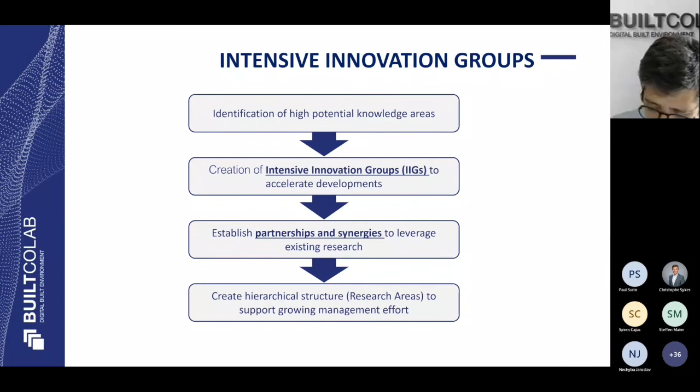The research areas we created are: smart transport infrastructures, IoT and smart technologies, BIM intelligence and digital twin, green transition, standards and digital transition. These were created based on our interaction with the industry, also based on the high potential knowledge areas we identified.

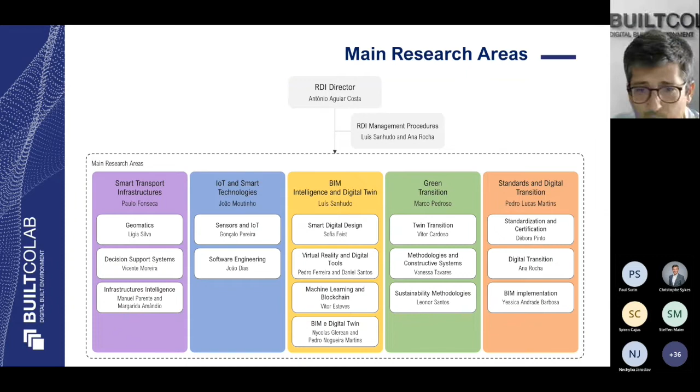And I might say that this BIM intelligence and digital twin area is one of the strongest right now. Also is what we think is the more mature in terms of development. So the distribution of the intensive innovation groups is this one.

The BIM intelligence and digital twin group has now many ongoing projects with the industry, and also some of them are projects that are funded and so on. But in fact, we have a very transversal approach, focused on the twin transition, and very much supported also by the government.

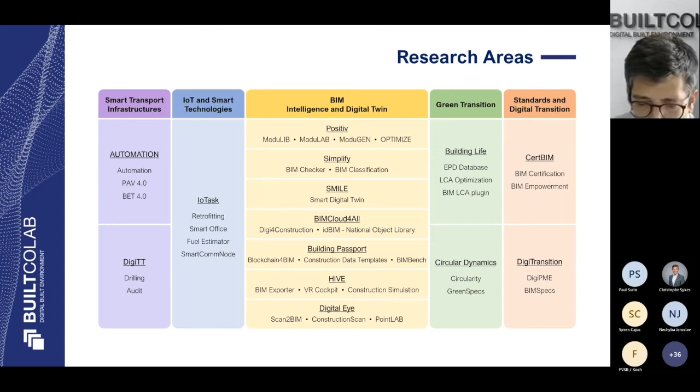For instance, within the green transition, we are right now doing the plan for the national plan for circularity in construction, and this is very important for us.

I would like to share some developments, and one of them is this. We must remember that we are less than 2 years old. One of our first developments was to try to bring modularization to BIM.

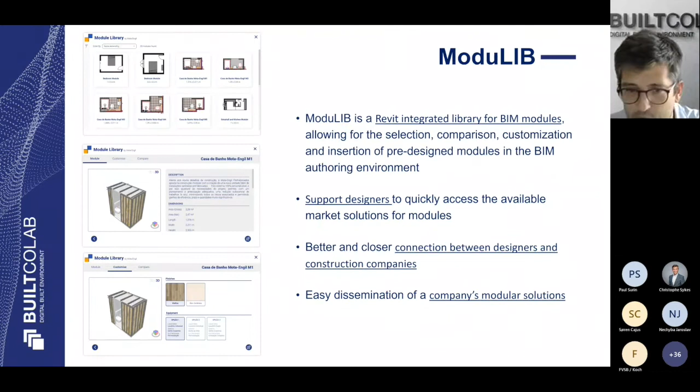Instead of having a BIM object library, we would like to have a BIM module library, which of course would try to incentivize this more modularized approach to construction.

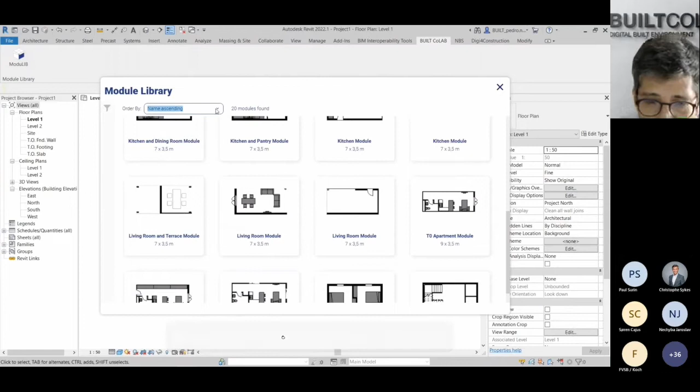So we have a small tool that allows us to have these modules, and we want to bring the supply chain to this platform that allows for this more modularized approach.

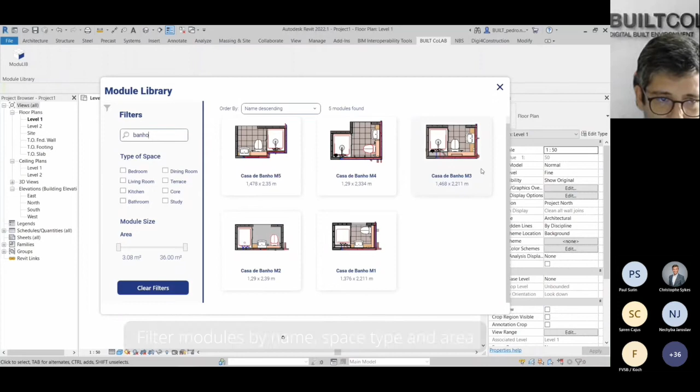Of course, when we showed this to the industry, they told us, well, this is interesting, but right now, and we were talking particularly with construction companies, they told us, well, right now we receive traditional design projects.

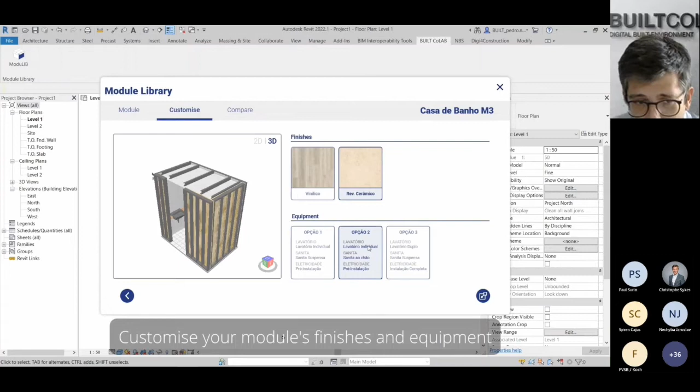They are not modular designs. So what we want is to identify the potential of modularization of this design project. So we stopped in terms of development this line of action. We have the plugin finished, but we start developing another

tool. This tool uses artificial intelligence to analyze the BIM model and identify similar spaces. We can apply it to every type of space. We demonstrate this with toilets.

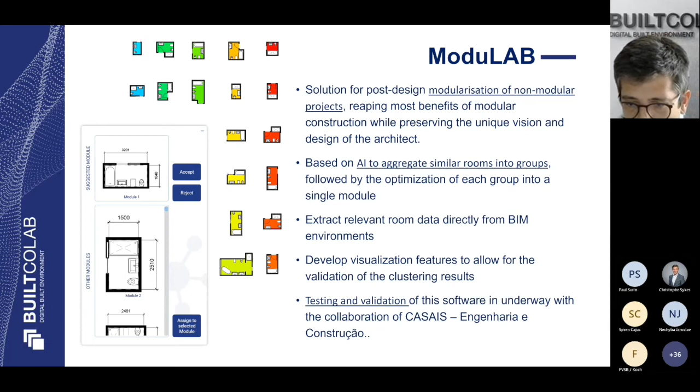And in fact, there is a clustering algorithm that looks at the different toilets or any other space and identifies similarities, groups the more similar, and actually it has a semi-supervised approach that allows the user to interact with the decisions.

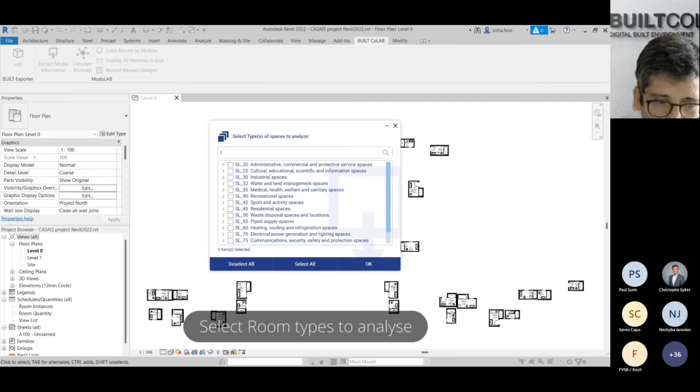And this was very interesting in terms of the receptivity from the industry, because they start looking at the designs, particularly, of course, the construction companies, and using this tool to decide the way to go. They understand better and more easily and quicker the potential of modularization of a specific design, and they can plan the construction works based on this.

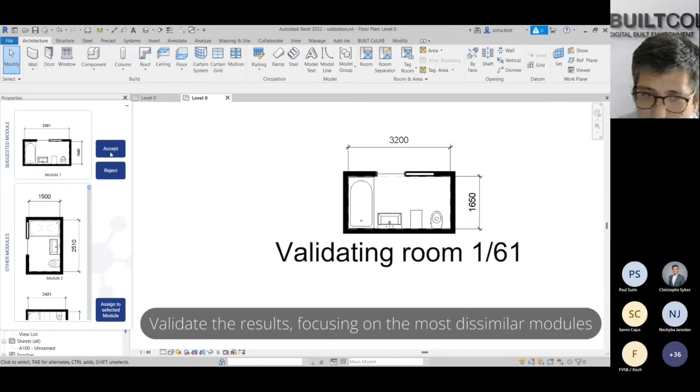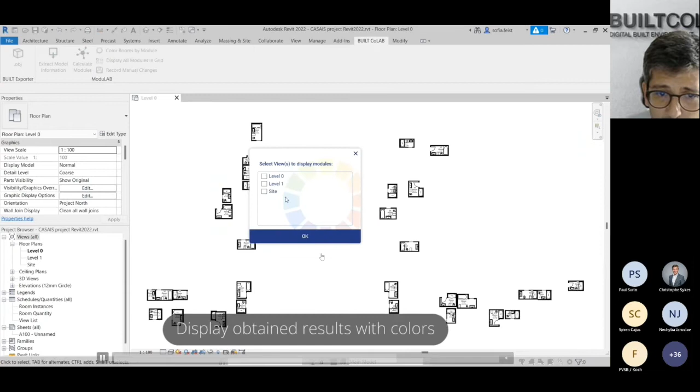So the idea is to identify the potential and then interact with the designer to see if it is possible to get to more modularized approaches. Well, there is, as I told you, a semi-supervised approach, and then the tool allows us to see the similarities and the grouping with colors, with a list, etc.

Then the idea is, as soon as we identified similarities, we can generate automatically the different models, and this is why we are right now developing a new tool that looks at the new proposed models with small differences. If we want to get groups, we need to have a little trade-off in terms of geometry, but then this allows to generate automatically the new toilets in BIM.

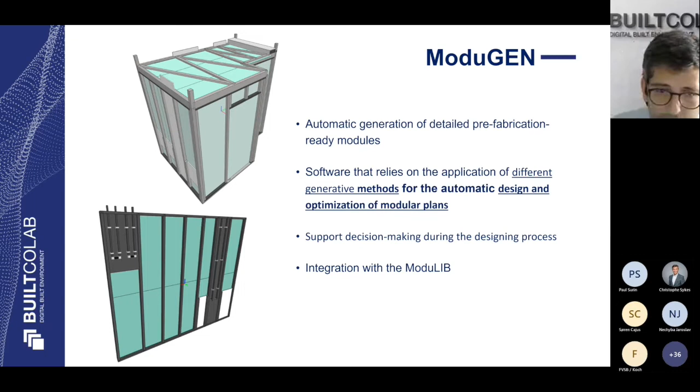Another development which is being done under the Rev@Construction project, which is a national project involving many companies, and its mission is, in terms of goal, is to have a platform for digital construction in Portugal, or at least some

technology to support collaboration. One of these developments is the BIM Object Library for Portugal, and we built CoLAB are developing this. The idea is not only to be a national library, to be more open to SMEs, particularly to the supply chain, also to integrate the modular approach.

But our idea is to integrate the product data templates platform, which we are also developing. We have a good connection to industry in terms of product data templates development, and we want to integrate this with the object library, and turn this object library also an information management platform, which will be useful even if we want to refresh, synchronize the new information with the models and so on.

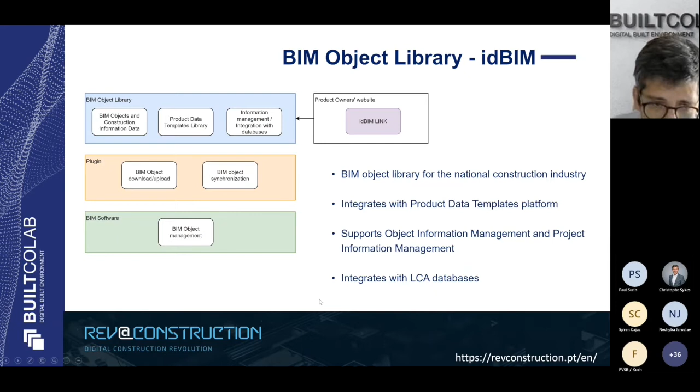This library will integrate also with LCA information. This is very important for us right now. We want to use BIM to assess life cycle calculations and so on. And so the BIM object library, which will have different parameters, will also integrate information from different databases, EPD databases.

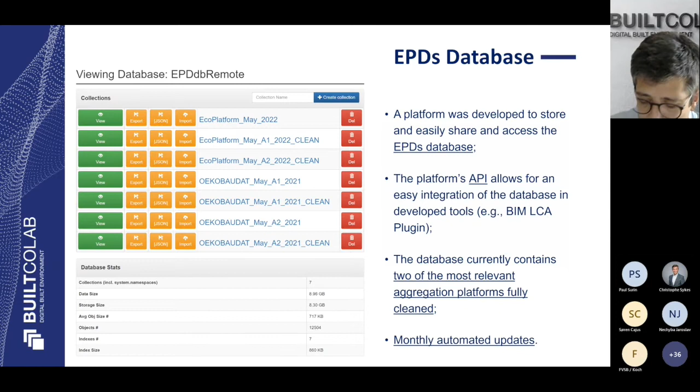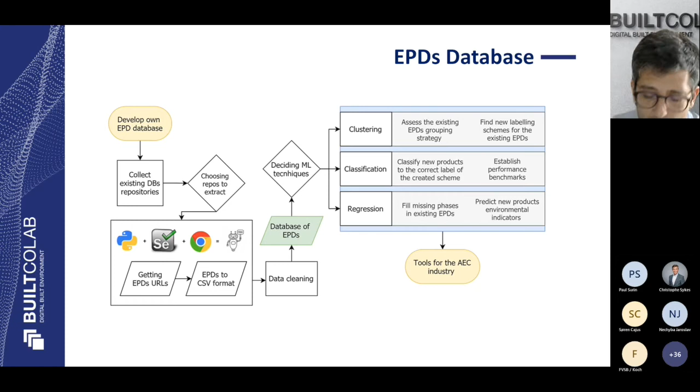We are getting information from several EPD databases, and we are also clustering the information, classifying the information, because we want to have a smooth connection between the BIM objects and the respective EPD's environmental product information. This is not easy. We studied a lot of the different databases, and in fact there is a lot of different structures of information, and so we are trying to get the information and then classifying it.

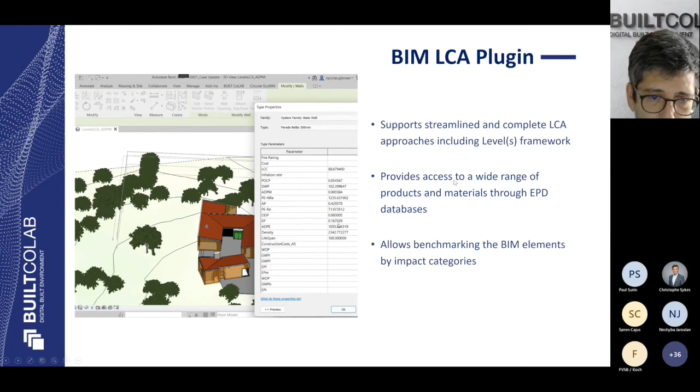And we have a tool that, based on BIM, will then support the life cycle assessment analysis, and of course create some new parameters and so on. And this is the tool. Another approach that we think is relevant for the industry is to guarantee the quality of the BIM objects and the BIM models.

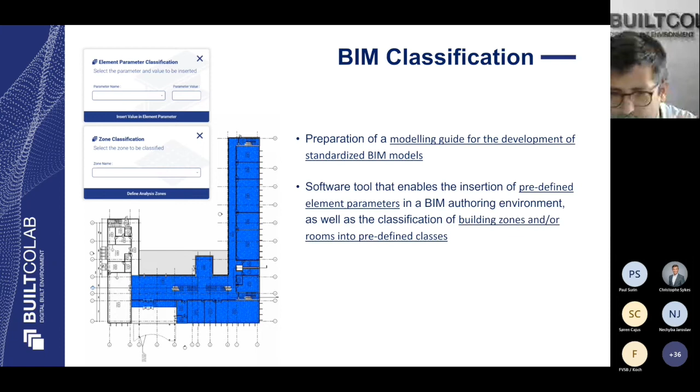So we are developing a new tool that will first of all support the classification of the model and the objects. It allows to, for instance, create new parameters, creating spaces following certain rules and so on. But then also we have the BIM Checker, which will allow to assess the BIM model, verify the parameters within each BIM object.

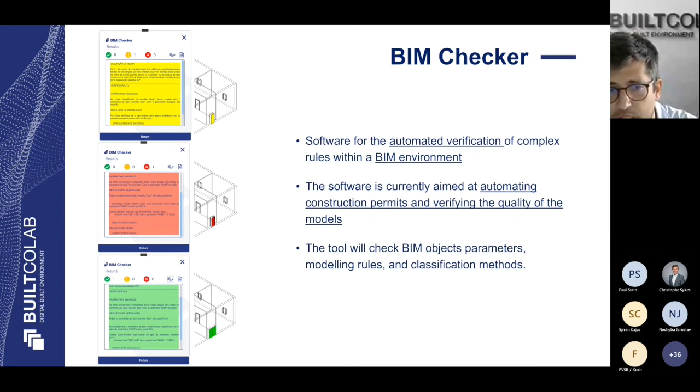We strongly believe that we need to guarantee the quality of BIM models and BIM objects, so that we can progress within the industry. That's a small video about this tool. It's a simple tool.

It's important to say that we are right now developing this based on Autodesk mostly, but we are prepared to develop for other tools. We don't have any problem doing that, and it's our intention.

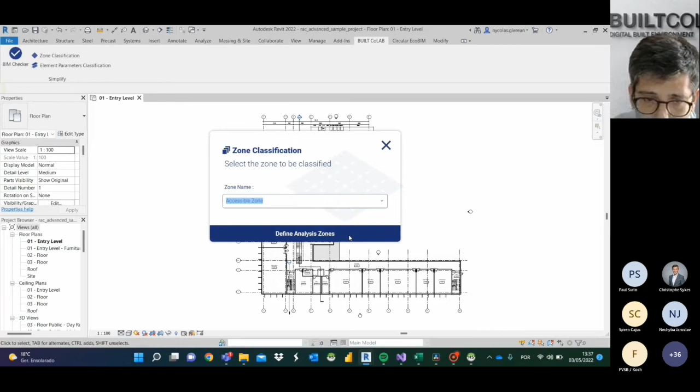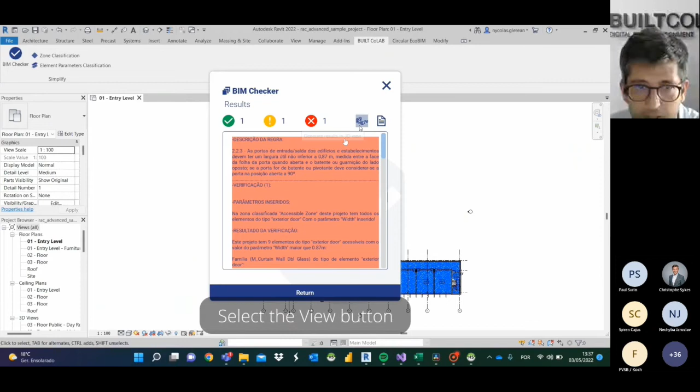So first of all, there is a tool to support the classification. We need to understand that some of these things is not rocket science. We want to reach the industry and give particularly SMEs simple tools that they can use and implement on a daily basis. So this is the BIM Checker and the BIM Classification tool.

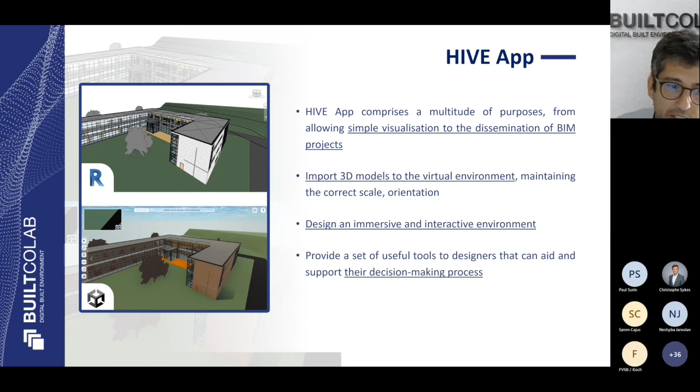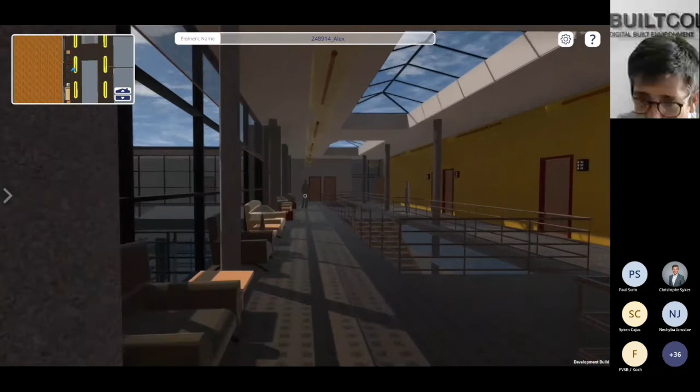And of course, then we need to go use the BIM in the facility management activities and so on. We created a simple plugin that transforms the model into a virtual reality environment. This allows us to work with an interface that is rich in information and can be applied to different users and, of course, applied to the different needs of the industry.

That will go forward because another thing that we believe is very interesting and has huge potential is augmented reality, also connecting with the idea of the BIM objects that are rich in information and so on.

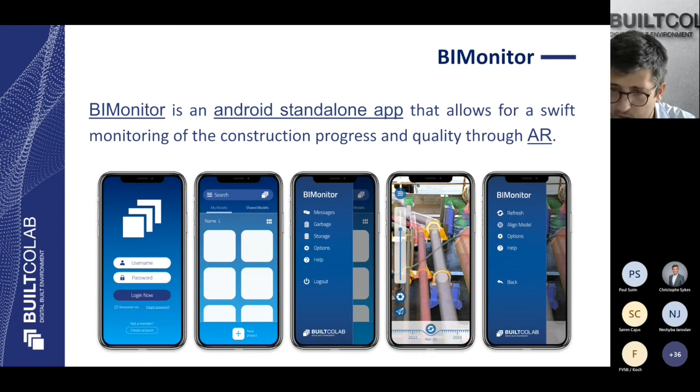In this case, we are developing what we call the BIMonitor, which is an Android standalone application that allows us to look at the reality, align the model with the reality, and then see what is constructed or not. We are right now, of course, doing some tests.

This is still under development, but the results are very interesting, and the application will also be applied not only to control or monitor construction works, but also to support facility management activities.

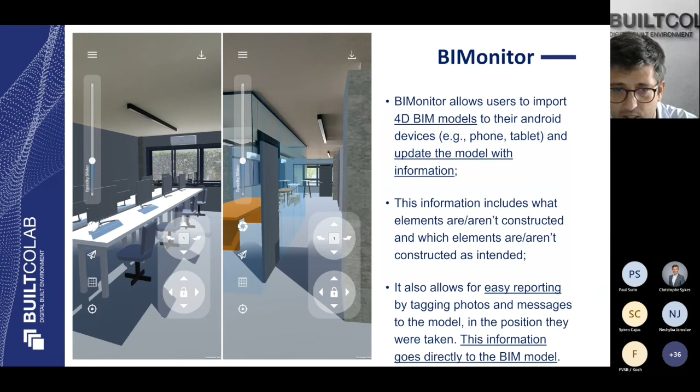For us, this is a very important direction of development: the digital twin. That's why we are trying to integrate several sensors applied to our office with a BIM model, and this is, of course, we see several examples in the industry.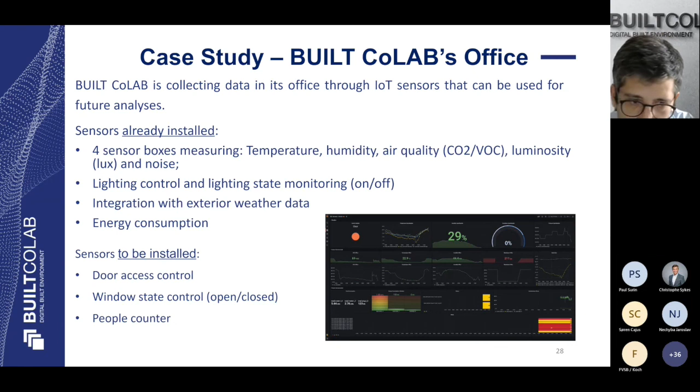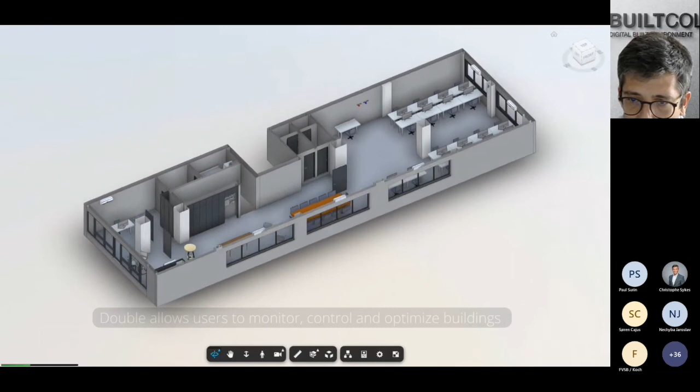Again, we want to do tools that can be accessible and easy to use. This is just an example. We are using existing BIM viewers. We don't want to invent the wheel, but we are alert to the existing tools and want to potentiate them. This is just our office.

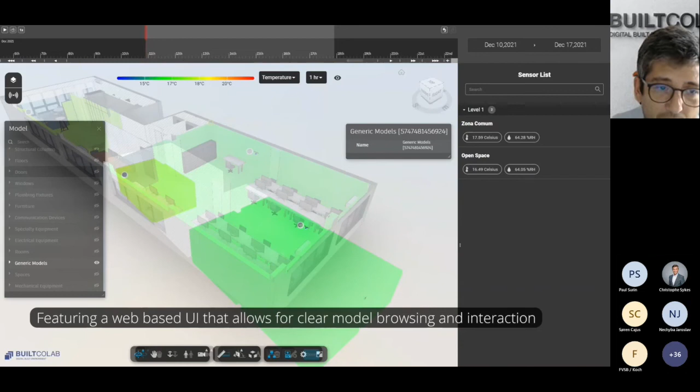Of course, the most difficult here is not to integrate, but to organize. When we are developing, as I told, the product data templates, we are already thinking about the parameters we need to have in the objects to support in the future these digital twins, the activity, the uses that we will implement, such as facility management and so on.

And finally, just to finalize, as we know, to have a BIM model of the reality, one of two things must happen: we must create a new design, a new project, or we need to do a model based on what exists, and for that we need to use laser scanner or other similar technologies.

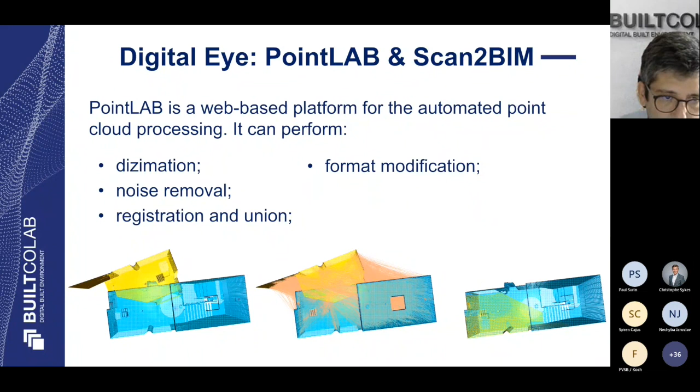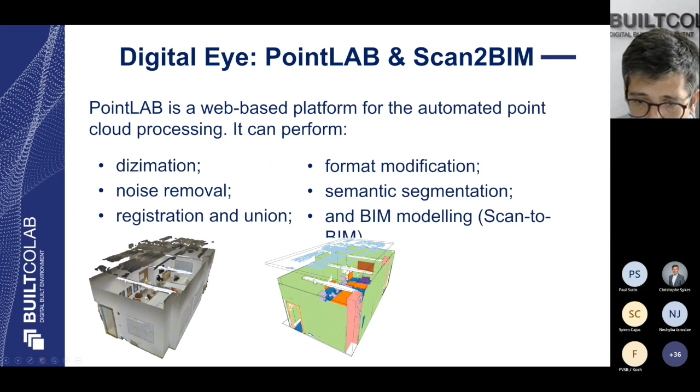We are doing a tool that will allow us to automatically generate the BIM model based on the point cloud, and we have already achieved interesting results. We have some segmentation already in terms of geometry and also semantic segmentation. And we are developing a platform that will help this more automatic approach of scan to BIM, let's say.

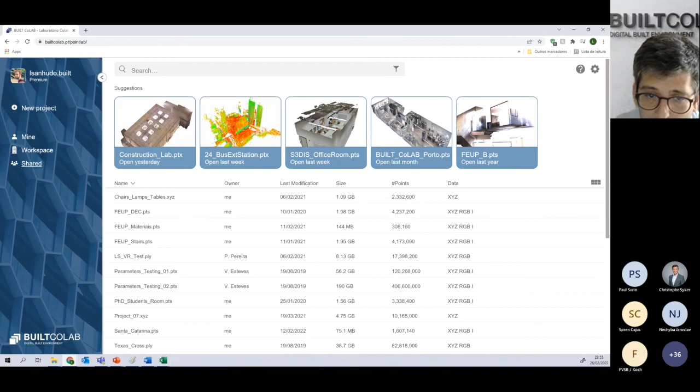Well, this was what I wanted to share with you. I hope it's useful, and I'm of course free for any question you have, and if you need other information, just send me an email, and I will be pleased to answer it. Thank you.